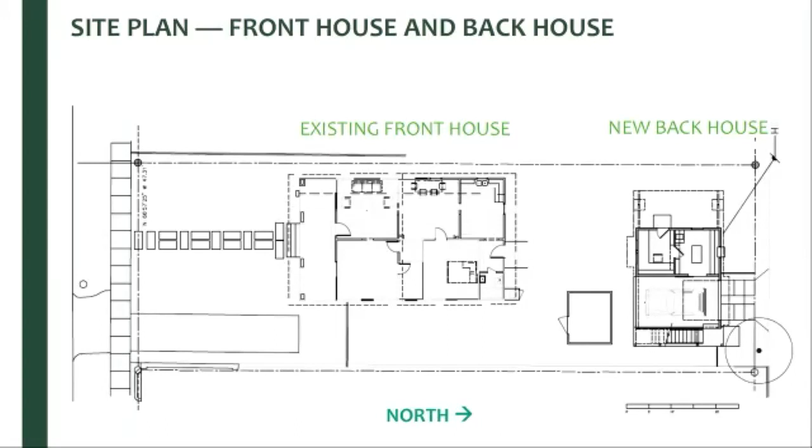Can we go to the next slide? You can see how we left the garage open, and this covered patio zone open as well. We're going to start by looking at the parts of the back house that we as owners use, primarily my access. Right now we're in that volume on the bottom first floor with the two windows in the stucco facade — that's where Craig and I are sitting now. That's my little 100 square foot home office, and I access it through the cantilevered, covered porch.

If we go to the next slide, you can see how half of the downstairs volume supports the front house, and the other half is dedicated to the back apartment, which is where we host friends and family, as well as short-term rental guests. Want to talk about the flow at all here?

Just that the flow for Dave and Molly basically comes from the main house to the back house, so the entrance to the office is on the right there. The flow for the guests typically comes off the alley — they enter usually if they're from out of town, coming by car, and they need a place to park, then they go up the stairs to the apartment upstairs.

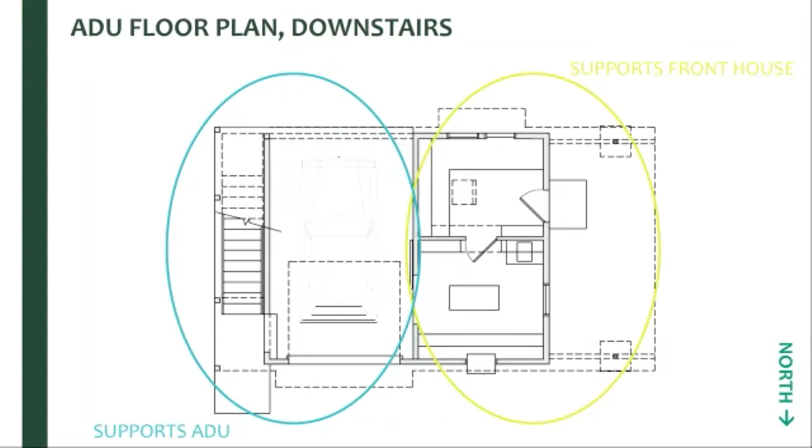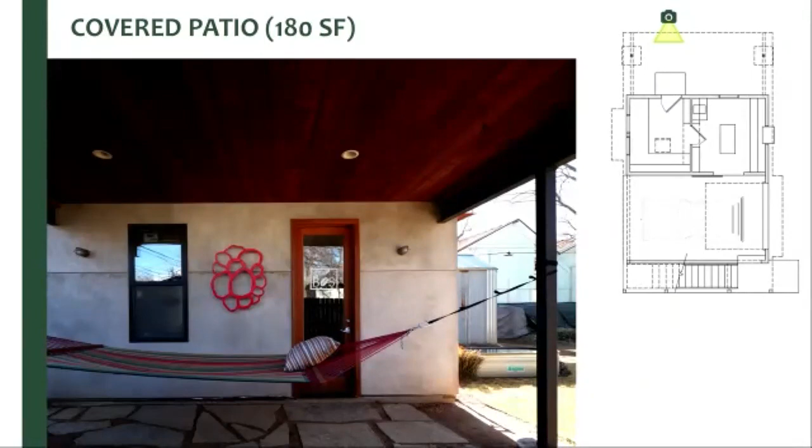Next slide, please. This is the covered patio zone, just outside my office. And if we go to the next slide, you can see the office itself.

The plywood wall cladding is a detail that I carried through from the storage room, which we'll go to next. It was a way for me to be able to hang stuff wherever, whenever I wanted, without necessarily needing to find a stud. Typically I'm still looking for a stud, but if a stud isn't where I need it to carry some load, that's 3/4 inch plywood on all the walls.

So it's all outfitted pretty rough and ready from the Texas State Surplus Store.

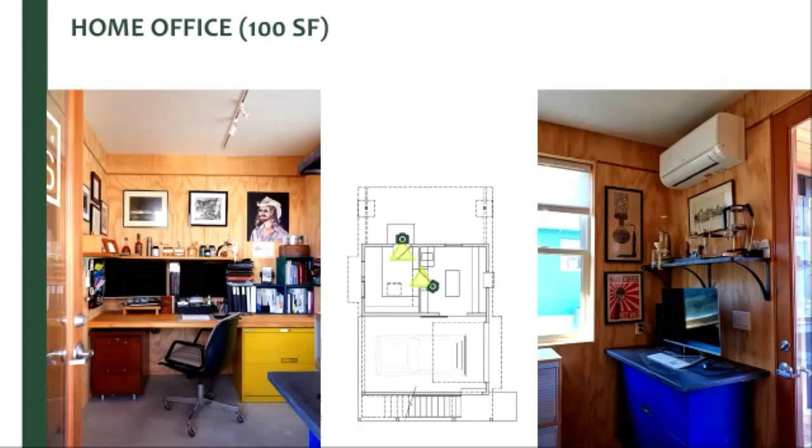Next slide, please. So you can see here, this is going from my office into the storage room. The second picture is from the carport back into the storage room.

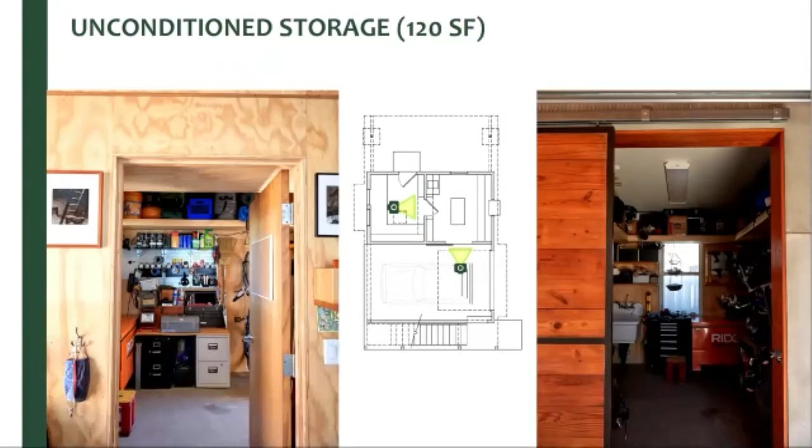If you go to the next slide, you can see that's one of two custom-made sliding barn doors we're using throughout the back house. We're using barn doors and pocket doors to minimize losing space to swinging doors. The nice thing about the barn door in this location is when Dave's working on a project, he can slide the door open and pull his tools out into the carport, or use the carport as a covered work area. It seems like every time I come over here, he's got some new woodworking project going in the house, and that really works well. It's an extra wide door, so it's a lot easier to manage an extra wide opening with a sliding barn door.

One of the things I wanted to talk about is a theme throughout the house. If we go back, please - you'll see there's a lot of salvage wood here. This is all antique longleaf pine. I've incorporated it into all the soffits downstairs, the door cladding, and the door trim details for the garage door and the door into the storage unit. That's all salvage pine that came out of 100-year-old homes being pushed over to make way for progress. For me it was really important to keep some of that high quality material out of the landfill and showcase it here in our back house, and it carries through some of the look and feel from our front house.

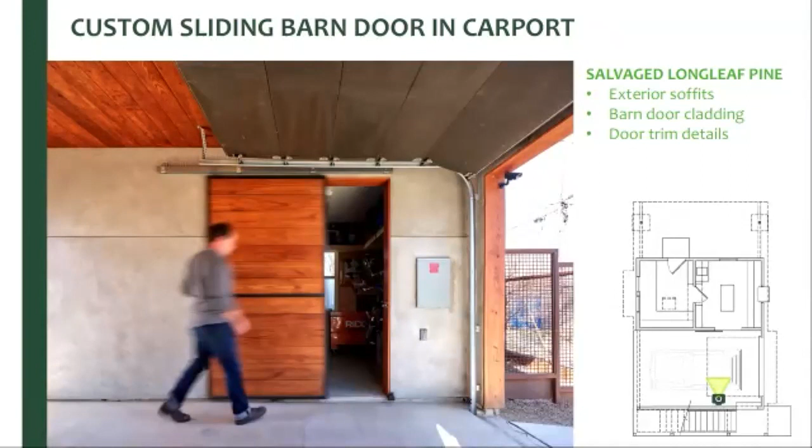Next slide, please. Want to talk about the alley? Yeah, this is the alley view of the house, and there's a couple of neat things about it. One is that it has an appealing presence on the alley, making it welcoming for the guests staying upstairs to enter.

We also have the majority of the service parts of the building - the electrical service, the solar inverter, and the mini split condenser - located back here in this area, which makes it easy for someone to service if needed, but also keeps it out of the yard area of the interior.

You'll also notice that the ground level of the structure is stucco, and the upper part is Hardie board siding. Having those two distinctly different finishes allows the house to look like an elevated cottage, which is really similar to a lot of the smaller homes in the neighborhood.

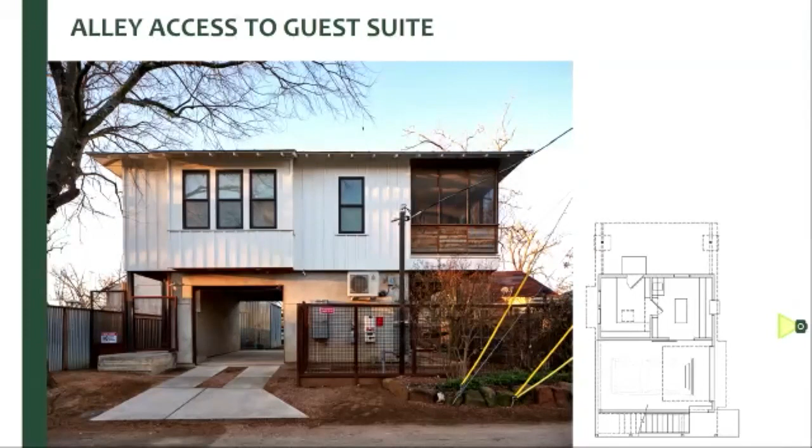Next slide, please. So this is the stair approach to the guest suite. Next slide, please. Craig will talk about the flow up here, or the program up here.

ADUs are allowed a maximum of 550 square feet, so that can be a challenge to make it really work well. A couple things we did was really maximize the circulation, so that when people are in the home, they experience the house in a couple different ways.

The doorways that lead to the screen porch - you can get there either from the kitchen in the morning with a cup of coffee, or from the living room in the evening sitting on the screen porch with its views towards downtown. And then in the living room itself,

it has a roomy feel because the space expands in basically all directions. There's a little bay window off the dining table, it expands into the kitchen, into the porch, and it's also a vaulted ceiling.

The circulation through the bedroom and through the bath, with pocket doors that hide away into the wall, allows someone to flow through the bathroom back through the entry as well. The other thing important to note here is we put the washer and dryer outside the building envelope, which we'll get to a bit more later. Yeah, if we can go to the next slide.

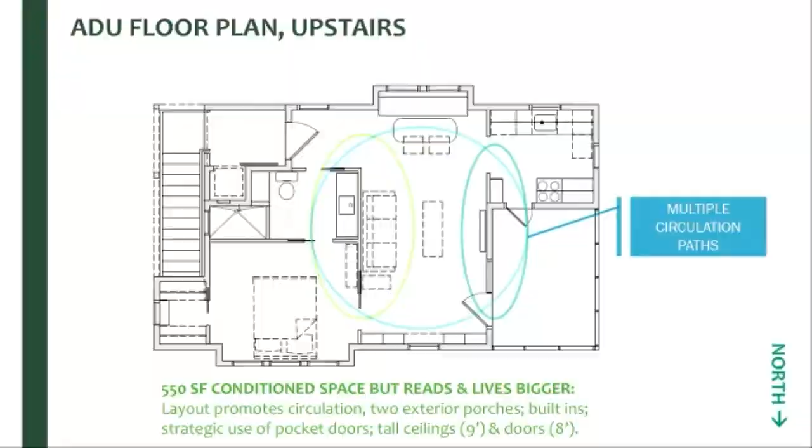So the downstairs is very utilitarian feeling, to be honest, and some of that's intentional. But when you come to the top of the stairs, it's like this jewel box. Part of what happened here is a series of lucky, happy accidents, where Molly found a 3.5 foot by 8 foot door made out of antique longleaf pine with really nice frosted glazing. You can see by the stars in the corners of the panels that it's a door that came out of the Texas State Capitol, found in somebody's garage.

It was on Craigslist. The wall material and floor material was a remnant pallet of wood that I was able to pick up for dimes on the dollar and use here. They were all short pieces of wood, a mixed pallet, and it would've been difficult to use in a lot of commercial settings, but this is such a small little landing at the top of the stairs that it just worked perfectly.

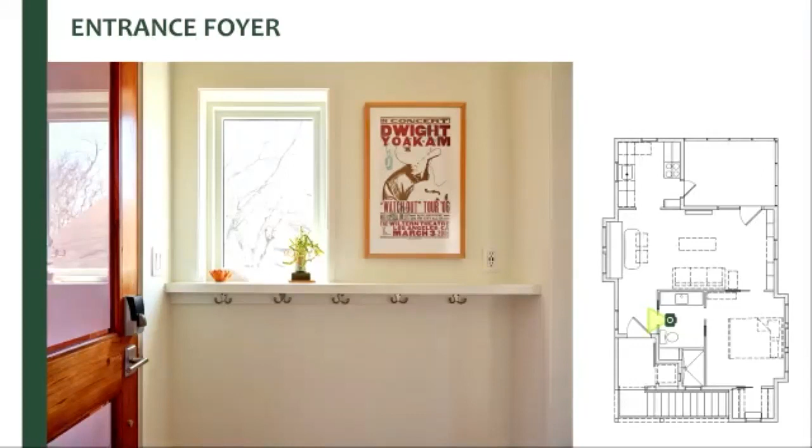Next picture, please. Even though this is a tiny little back house, it has sort of a foyer, which our 1,000 square foot front house doesn't have. There's something interesting in this foyer that compresses everything. Before you go to the next slide, please.

It's always interesting to me that the back house is small and intentionally feels smaller. We tried to keep it scaled down from the front house, but this is the biggest room on the property. It's bigger than any single room in the front house. Yeah, so we can go next slide.

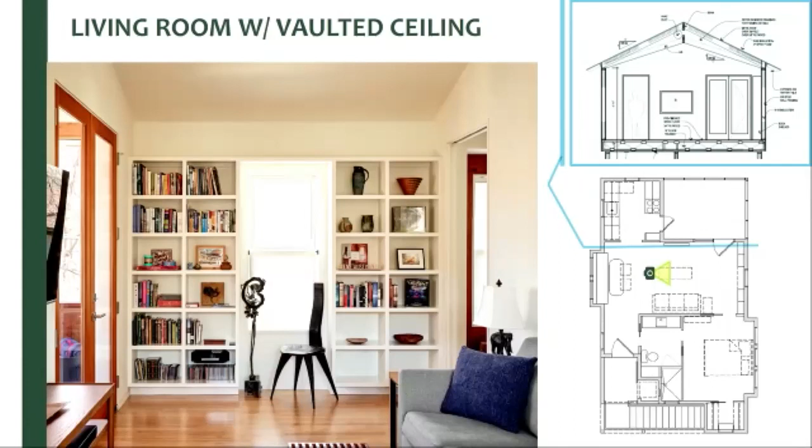This is looking at both ends of that kind of living room, that multi-purpose space. This is the little dining bay that you experience when you walk into the house. There are 2 bays upstairs, which are really helpful in a couple of ways.

One is they make the space feel a little bit bigger without making the whole room bigger, because we were right on the line in terms of 550 square feet. We needed just a couple more feet for the dining area, so you can walk past it into the living area, and we also needed a couple more feet in the bedroom area. But also those bays correspond to elements on the first floor, which is windows above the office and the garage. Next slide, please.

Next slide, please. So here you're looking from the living room into the bedroom. You can see the living room is primarily a couch, TV, and a little dining zone, but it's pretty luxurious when you think of it as a guest suite, because if you go to the next slide, you'll see the bedroom is completely separate from the living room. Next slide, please.

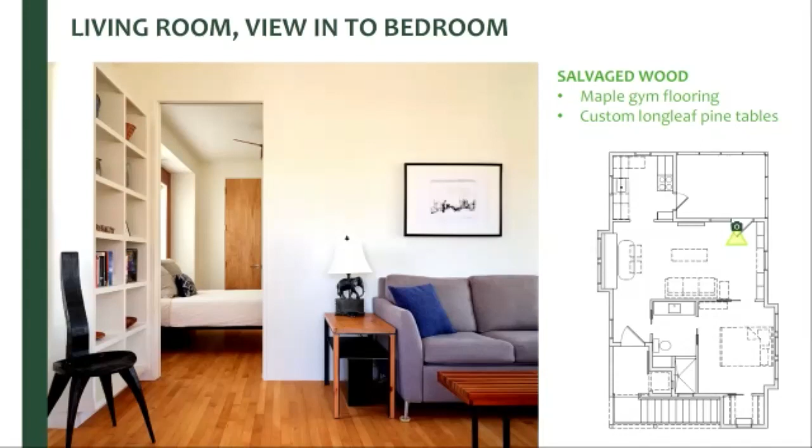Because it's a small space, we were able to do some interesting things. We had a friend build a custom-made bed for this space, which is a standard queen size bed in a manner of speaking, but it's designed for a compact footprint. You can even see the offset leg on the bottom, so it's not a toe banger. Where we have this bump out, I did a treatment using the salvaged longleaf pine, which created a headboard of sorts, an accent wall behind the bed.

So, next slide please. Want to talk about anything here, Craig?

Yeah, and it's worth mentioning that all of these interior doorways are 8 feet tall, so they're extra high, and the ceilings are 9 feet tall. So again, it's a small space, but it reads a little bit bigger.

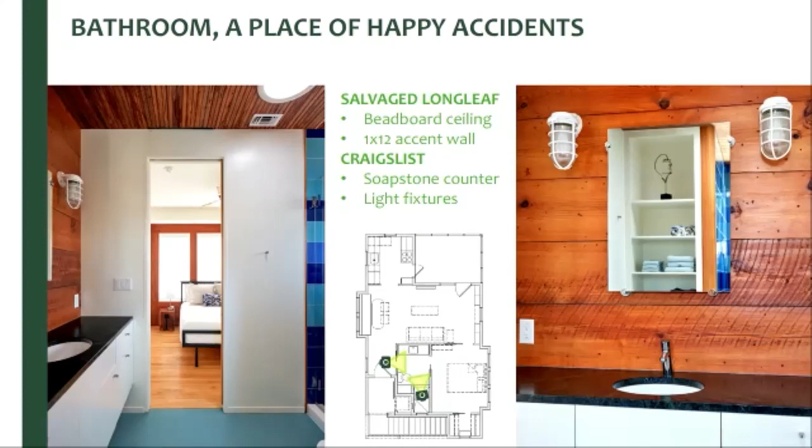If you go to the next slide, you can see we have friends who donated some remnants of tile that came out of a public art installation, at the district chiller cooling station just north of the convention center. When we finished tiling that shower surround, we had exactly 5 tiles left over — essentially the remnants of the remnants of the remnants of the tile off of that project. What was interesting is that it was this found material, donated from friends of ours, Stan and Martha Pipkin, but it pushed us out of our comfort zone. It's one of the more interesting moments in the back house, in my opinion.

Next slide please. You can see here the other thing worth mentioning is that there are a lot of built-ins, and for the most part they were in the original plans. We knew that if we did built-ins, we could get a little more space — things would read a little bit bigger.

One of the interesting things as we're looking through these slides is that because you can see into the other rooms, the natural light in this space is really good. Depending on the time of day, there's always some light coming into the home. In all these photographs there are no interior lights on, because it's a really nice space with all the filtered light coming through.

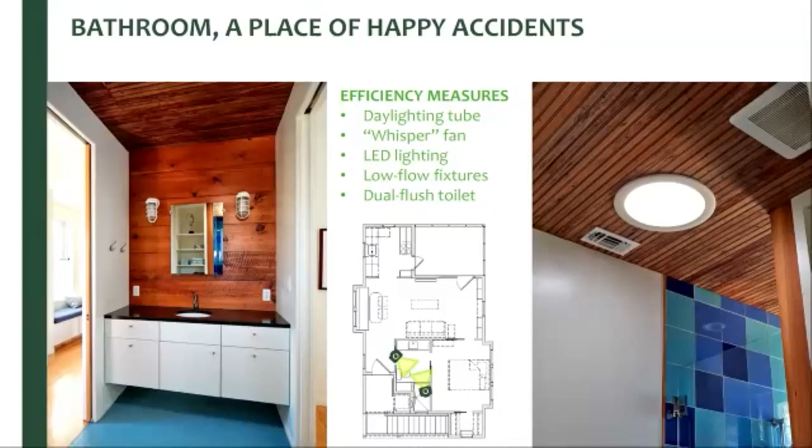One of the things we did, maybe not part of the original plan, was sneak in a sun tunnel that brings light in off the roof into the bathroom. Normally you'd put that on the south face of the roof, but in our case we put it on the north face because, as you'll see later, there's solar on the south face. Next slide please.

This is another strategy for bringing light into the room. This was the screen porch — during the shoulder months, the time of year when you can live with your doors open, this makes it a really pleasant space where you can put the doors open and enjoy that additional porch area as part of the living space, or just be out on the porch. The porch is on the northwest corner of the house, so it has views towards downtown, which also makes it an interesting place to be.

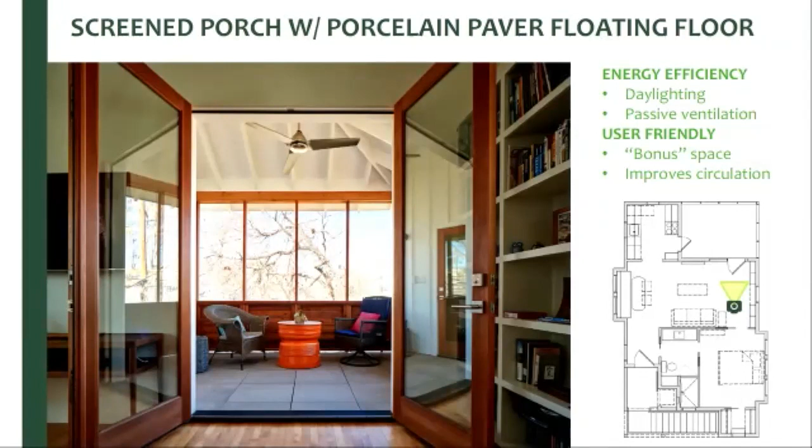Okay, next slide. What's sort of interesting, as a little setup, is that the porch is actually bigger than our kitchen. So Craig found a way to make a kitchen work in 64 square feet.

The basic layout is a galley style kitchen, which is the most efficient way to lay a kitchen out, because you don't have any lost space in corner cabinets. We also went to smaller appliances — a smaller dishwasher, smaller refrigerator, smaller stove, and a single basin sink, which is really all you need with the dishwasher.

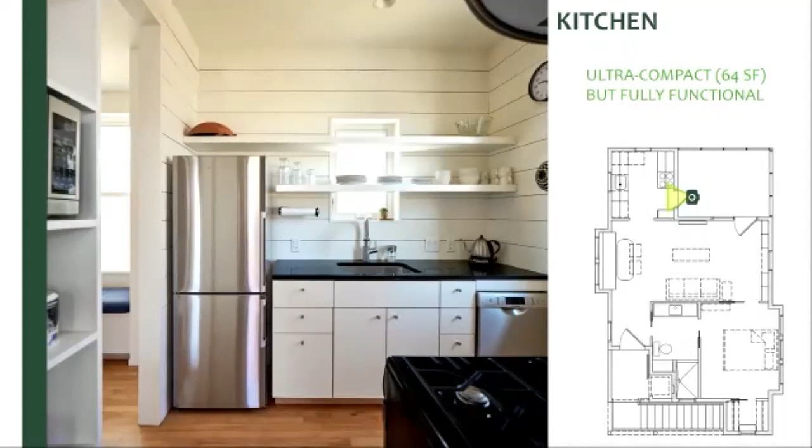There are two windows in the room, so you have light coming from two different sides of the building, and there's also access to the screen porch, which makes it feel like you can just walk out there in the morning to check the weather. The open shelves make it feel more open as well, and since it's used primarily as a short-term rental, it just has the basic things you need for staying there a few days.

I think one of the things we did here is reuse salvage wood again. In this case I painted the shiplap for use on the walls. Because it's a small space, I could use material that's labor intensive to salvage, but it's a place where we could use it for maximal impact.

So this is us heading back out of the apartment. One thing I should mention is that these floors are nice maple floors, but they're salvaged. They were originally a gym floor, and they were reinstalled here and then refinished.

Want to talk about the built-ins? It allows for a little additional storage. We use it to tuck in all of our toilet paper, extra towels, and a lot of the things we need to operate that guest suite.

One of the craftsmen who worked on the house, Aldo, helped me build the table also. It's a nice artistic element as you walk into the house, made from a live edge slab of pecan, which is a native wood. We built two tables specifically for this back house, and the bed. There's not a lot of furniture back there, in part because there are so many built-ins, so we were building things to fit the spaces.

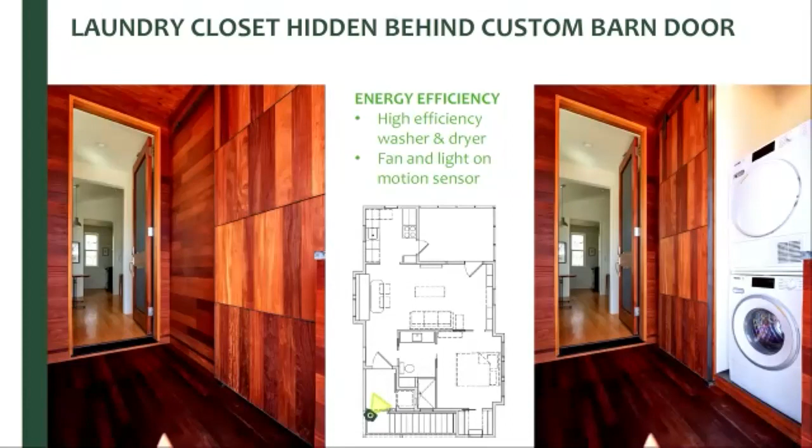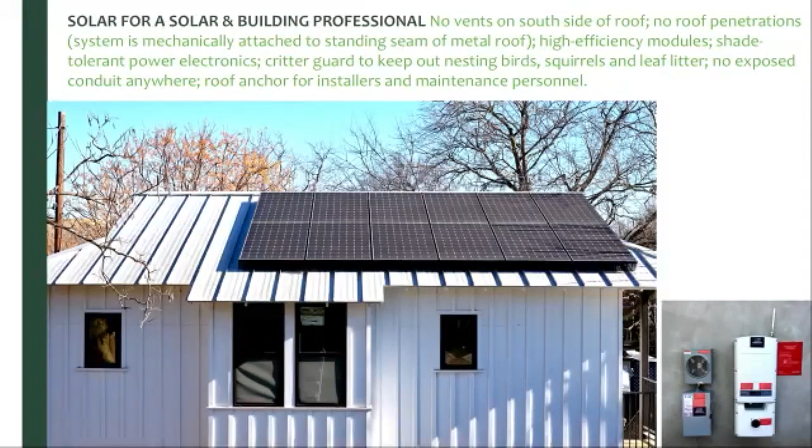Here you can see 4 kilowatts of solar on the roof. I work in the solar industry, so I had some priorities for the array. We made sure all the vents run to the north side of the roof, and specified a true standing seam metal roof that lets us mechanically connect the solar array to the seam. So the only roof penetration is a single conduit collecting all the electrical off the roof, which runs inside the framing down to the inverter at grade level. Even at the inverter, there's no exposed conduit anywhere—that was really important to me.

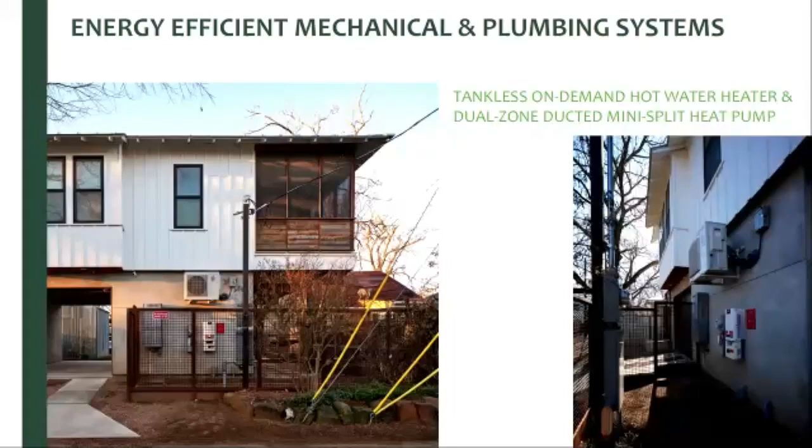This is again the utility corner where all the business is happening with the service and mechanical system. That's a tankless on-demand hot water system, ultra high efficiency, and it's also an ultra high efficiency two-zone mini split system. It's ducted upstairs, and there's a separate cassette down in the office, but they share the same outdoor condenser.

This is just to quickly show you how we worked. You can see the top left is actually a picture from the inside of our front house, where we have a lot of the antique longleaf pine exposed.

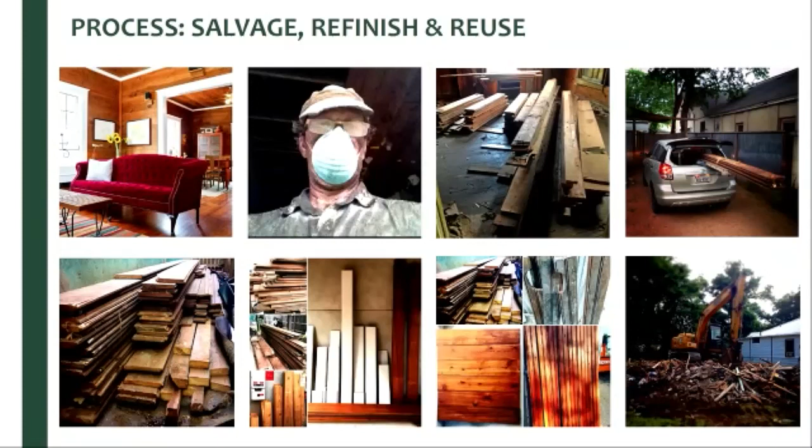And so I was going into these old homes in the neighborhood, salvaging material and refinishing it before those homes got demolished. You can see here this was originally a 1x12 board that had wallpaper on top of it, and it got repurposed into a bathroom vanity.

Here I had salvaged some 2x4s out of a ceiling, and I knew there were no nails, so it was clean material. We were able to rip it down and make a slat table that serves the back house.

Some of our friends, like Aldo and Sean and others I know—I've essentially worked in the building trades my entire adult life, and a lot of our friends and neighbors are in the trades, so we used a bunch of them on the back house.

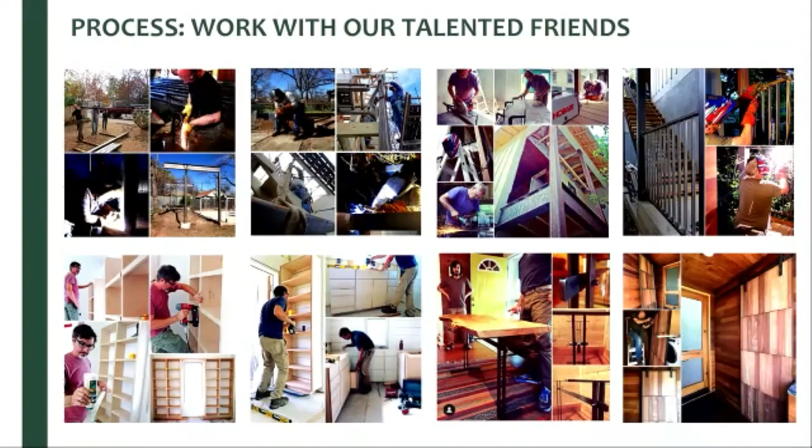And then Molly and I did a ton of work ourselves, so you can see us working here. Next, want to talk about the alley?

This is an exterior view of the house from the alley. One of the beautiful things about ADUs on the alley is that I feel they make the alley a safer place, because there are eyes on the alley, which makes it safer for people to walk and use. It also creates more pride in the alleys, and each homeowner starts taking better care along that fence line.

This is also a good view of the roof line, which we really considered because it's a taller structure on the back of the lot. We wanted the roof line softened by doing this hip-gabled technique, which also allowed us to have a large shed area facing south for the solar array.

That hybrid roof also allowed us to justify the array to the right to avoid some shading—moving the array to the east to avoid shading in the afternoon from a neighbor's tree. And that's the end of our tour.

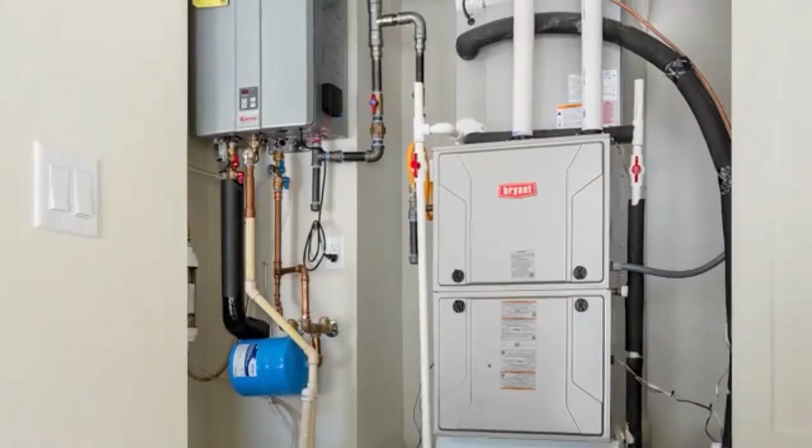The home's two-story design uses efficient cooling strategies, including deep overhangs, a metal roof raised above the roof deck, and a staircase to maximize natural airflow and ventilation. A sloping roof allowed the architect to include high recessed windows to provide natural daylight without overheating the residence during the hotter months. Efficient appliances and equipment include LED lighting, a variable refrigerant heat pump for heating and cooling, and a tankless gas water heater to help the homeowners save on utility bills.

With the desire to safely age in place, the homeowners created an accessible bedroom and bathroom combination on the ground floor, with a wheelchair-ready bathroom that includes a roll-in shower and roll-under cabinets. The couple enjoys outdoor living with an inviting front porch and a second screened-in porch that takes advantage of the prevailing breezes, creating a pleasant space where they can relax throughout the year.

The homeowners' desire to nestle into the Texas landscape and enjoy their natural surroundings on a challenging lot inspired their goal of building an environmentally responsible home using high-performance building strategies. They stepped up to the challenge, creating a practical, livable, and sustainable home by maximizing both indoor and outdoor spaces, while ensuring their access to spectacular Central Texas views. This thoughtful planning will bring them enjoyment for many years to come.

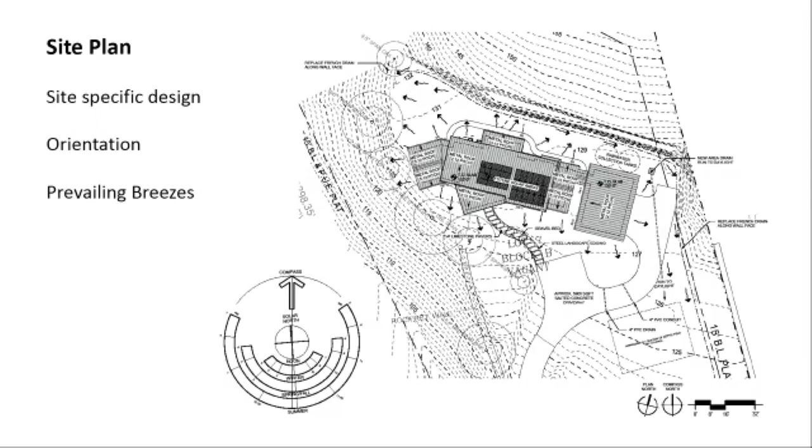We design, and this is important for planning, to show the builder and everyone else where the solar panels are supposed to go - those are the two darker rectangles on the roof. We've learned our lesson there, because if you don't show that, a plumber might run a plumbing vent up through there, or the AC guy might run his furnace vent through the area planned for solar panels. So that's really important to do.

You'll see the porch on the left, which absorbs the prevailing breezes, comes up through the kitchen and up the stairs and out the stair tower windows at the top. So we create a siphoning effect going through the house, not just cross ventilation, but a siphoning effect.

From an indoor air quality perspective, we separated the garage and workshop from the house, so the somewhat unhealthy air in a garage - from off-gassing from your car, lawnmower, leaf blower, or paints - doesn't migrate into the house. That was important to them. Their health was critically important, as was daylighting.

Do you see anything on this you want to note? Well, I think two things to note: the front door faces the approach from up the long drive from the street side, and we also wanted to take advantage of the ravine to the left.

Hence the screened porch, which we typically don't like on the western side, but there's a high hillside just across the ravine, so it shields the screen porch from the west, and we get to really take advantage of that natural feature - one of the primary reasons why the client bought this piece of property.

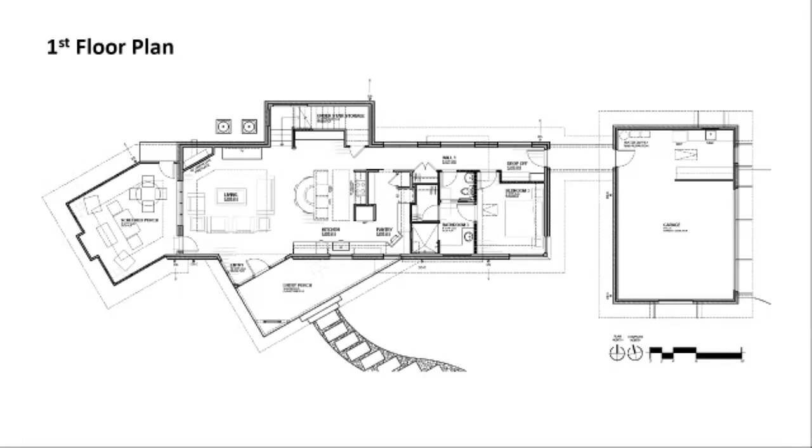But if you look at it, it's a pretty simple rectangle with just the front porch turned at an angle and the screen porch turned at an angle. So it's a very efficient home to build. Let's go on to the next slide.

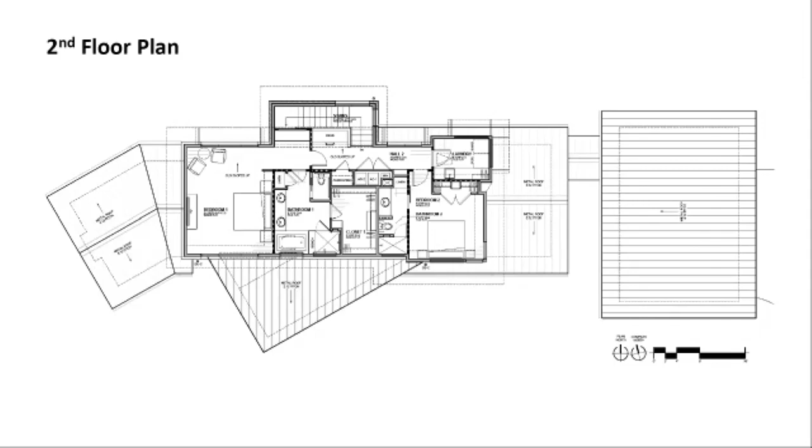We talked about the east-west orientation. You'll notice the roof has quite a big slope facing south, so it would make for a fantastic solar collection device. We pre-wired the house, as we do with all of ours, for solar. I don't believe they've installed the solar yet.

So you actually have more windows with unobstructed views and unobstructed access to daylighting outside because you dealt with the issue on the outside of the house rather than the inside of the house.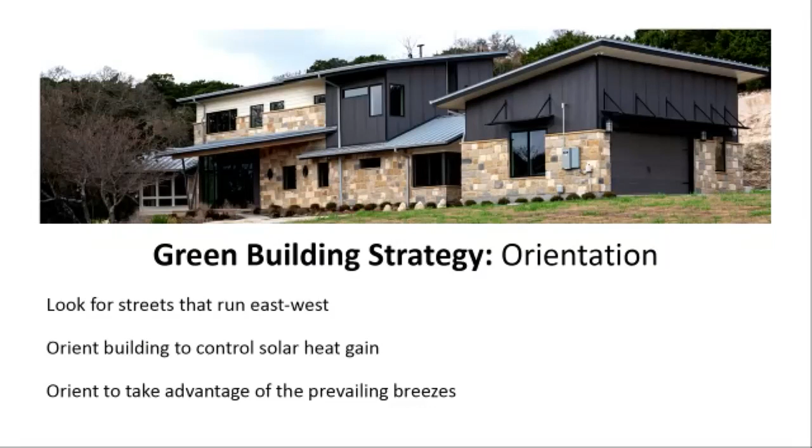Next slide. Joel had fun here, our project manager. Joel's behind us. We developed a new detail for the awnings to be hung from above instead of brackets going down below. Anything else in there, Joel?

Well, it's important to note that typically we like to put our garages on the west side of the home to use that program to shade the rest of the house. But in this case, with the hill on the west side, we weren't so worried about the western exposure. And they also had a neighbor to the east that was actually fairly close to the property line, so they really wanted to use the garage as more of a privacy buffer than an energy saving.

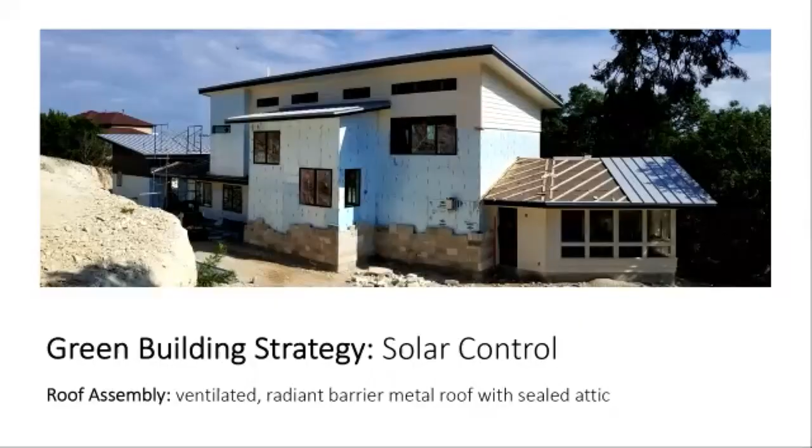And the reason why the lathing is shown running at angles is so we didn't have to have two layers of lathing crisscrossing. We just had one that can go from rib to rib on the roof, but at the same time provide air channels. There's some details about how we separate all the wood pieces so there's a continuous flow of air from the overhangs up to the ridge. It reduces the heat flow into the attic much more so than a previous product we developed, which was called Tech Shield Radiant Barrier. This is the type of stuff I really get into, and you can tell, but let's go. Next slide.

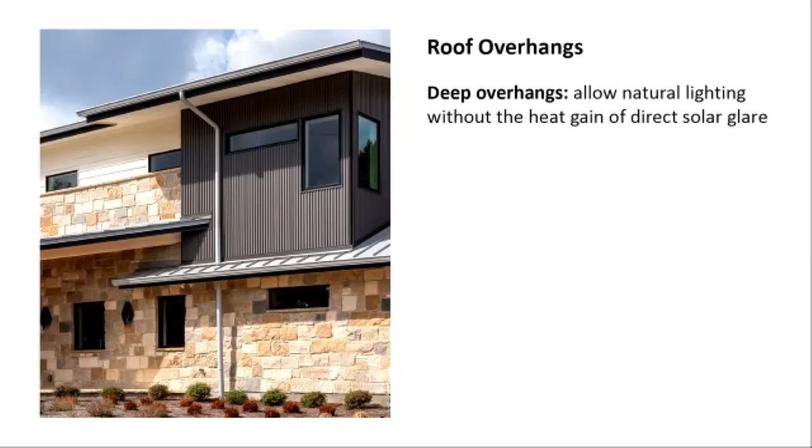Next slide. Many years ago, I was attracted to come to the University of Texas because of a professor, Paco Arumi, who was developing the first means of using computers to analyze how houses actually use energy. And then through Mac Holder, my former employer, we developed that into a very useful design tool. And we can actually show our clients, gee, if we do have this glass that goes a little bit further down to the ground, it's going to add a half a ton to your air conditioning needs.

So we can really tweak the window pattern, the awnings, and the air conditioning system to make sure we've optimized the house. And we do use old school solar angle calculators by Libbey-Owens-Ford.

I'd also like to comment on the neat design here of the awnings. Joel, that was something you did. We were trying to adapt our more standard detail for that inverted awning over the garage door, so this was another iteration to get the two different types of awnings to relate to each other.

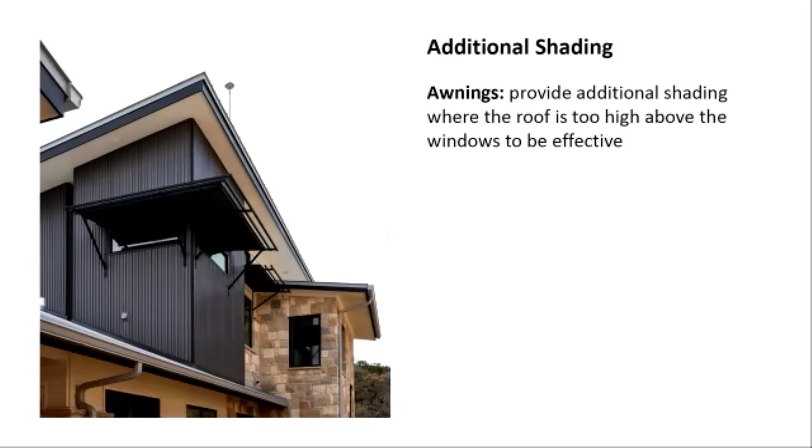I think the big thing is when you have a long face facing north, load it up with windows, take advantage of that free reflected light to bounce it into the house in many different ways. In this case, the light colored metal roof and the white soffits help reflect and bounce light into the clerestory windows, pushing it further into the house and increasing the daylighting.

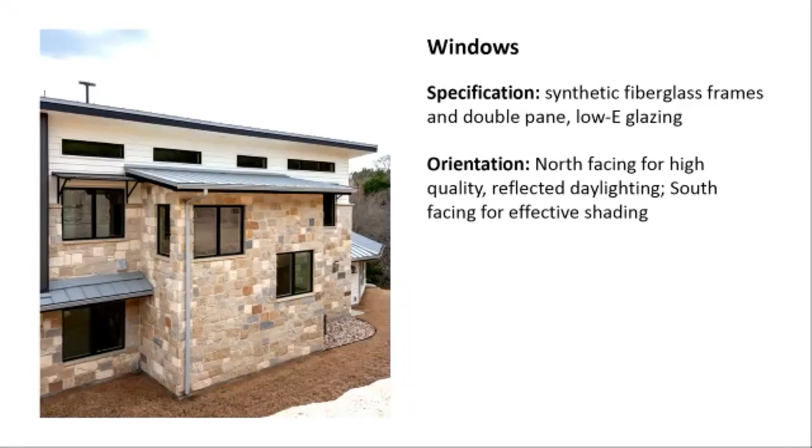We actually used that big cut in the limestone bluff behind us as a big reflector of daylight into the house.

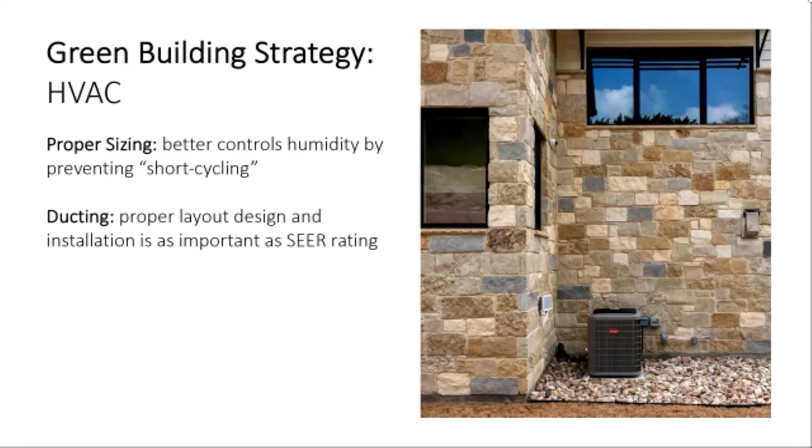This is one of the great things about that energy run I learned to do through Mac Holder's office. It really helps us closely size the air conditioning equipment to the actual load. I presume at this point many listeners understand how an oversized air conditioner isn't good for you because it doesn't provide good humidity control. So we're very fastidious about making sure the air conditioner is not oversized and works a lot, so it really dehumidifies the house well because it runs longer.

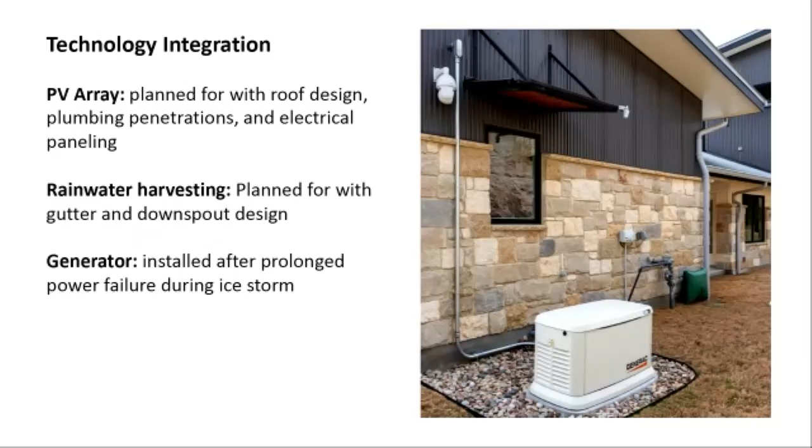There are people who think, well, I want to do a solar system and put a bunch of Tesla batteries up in the garage, and then I've got my protection for a power outage. But if you do the numbers, you might get about 4 to 8 hours of stored energy, and then you're in the cold, so to speak. That's one of the lessons we really learned during the freeze this February. As much as we love solar systems, guys, we do, they are not a substitute for some type of emergency source of power. In this case, a small natural gas fired generator.

Next slide. Well, I'll say one thing.

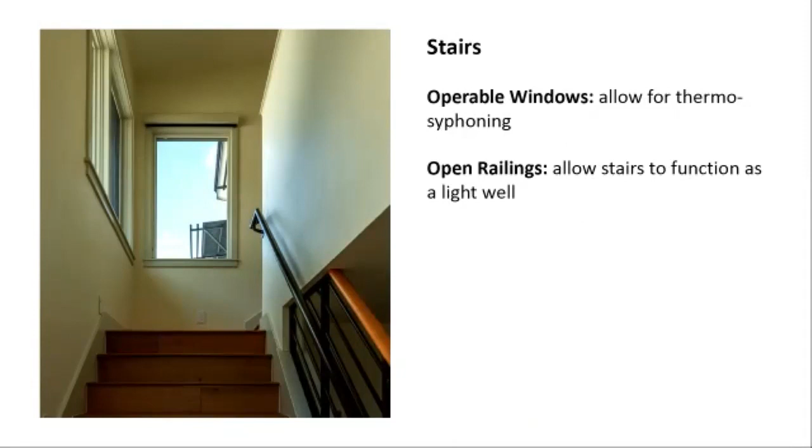I think you see the operable windows up at the top of the stairs so we can vent out the house. Next slide. Clerestory windows you see up in the right there that bring in a lot of reflected light into this upstairs hall area.

And also down the stairwell too. Yes. Next slide.

We talked about this, but this is the garage on the right. No, the garage on the left and the house on the right. Doesn't matter, the point is they're separated, so we don't have any of the bad air from the garage migrating into the house. Next slide.

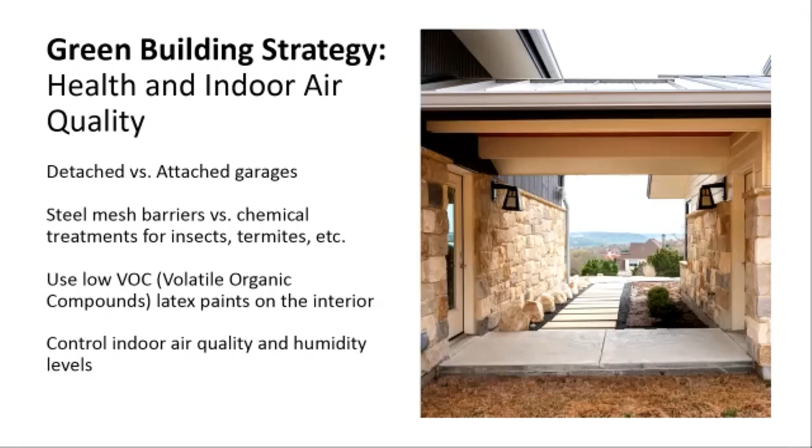Spray foam insulation is just so wonderful for keeping humidity out and reducing air infiltration. We really take pains to wrap the house in a good weather barrier, a commercial grade building wrap. We don't believe in just taping pieces of plywood together and calling that a wrap. We also really promote the sealed attic perspective.

We have a ventilated roof system on this house with a sealed attic, which is the best of both worlds. These are consistent practices on all the houses we do, and we test it by having our clients, after we design with an energy analysis to tweak the performance of the house, send us their utility bills for the first year. Then we go back and compare the real world results with the theoretical energy analysis. Usually we're within about 5 to 10% accurate.

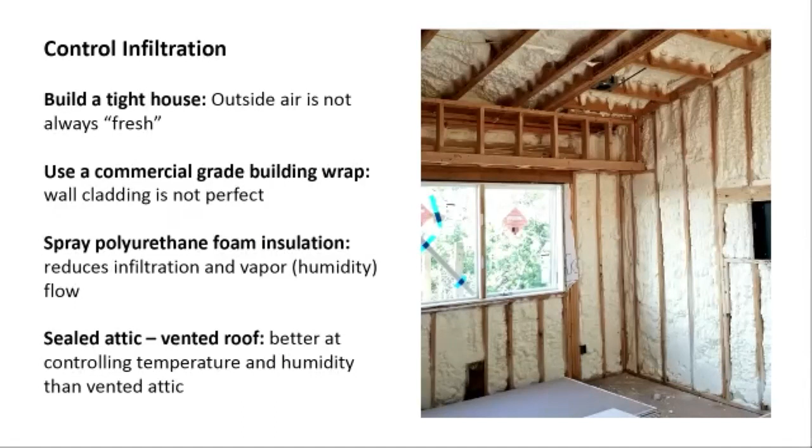Next slide. Oh Joel, what do you think here?

As requested by the client, the primary master suite is upstairs, which is kind of unusual for an age-in-place situation. But as we discussed with the client, they really believed in the health benefits of navigating those stairs daily, just to keep them more active. We had a cardiologist client say to us many years ago that his healthiest patients are those who have to go up and down stairs often every day.

Next slide. You'll notice something here with the bathroom. Aside from a kitchen, a bathroom is another place where we use a tremendous amount of energy, primarily associated with lighting. Let me just stop there for a second.

The reason why you hear us concentrating so much on the way we address daylighting and lighting is that, next to air conditioning, your second biggest consumer of energy in a typical custom home isn't the heating, isn't the water heating, but it's the lighting system. That's why you see we do so many light colored reflecting surfaces and try to harvest outside daylight as much as possible.

As we get older—which of course Peter and I here, Alan might be, but I'm not—aging in place doesn't only include physical access, it's harder to see as you get older. Your eyes start not taking in as much light. So this constant attention to lighting and daylighting helps a client see better as they get older.

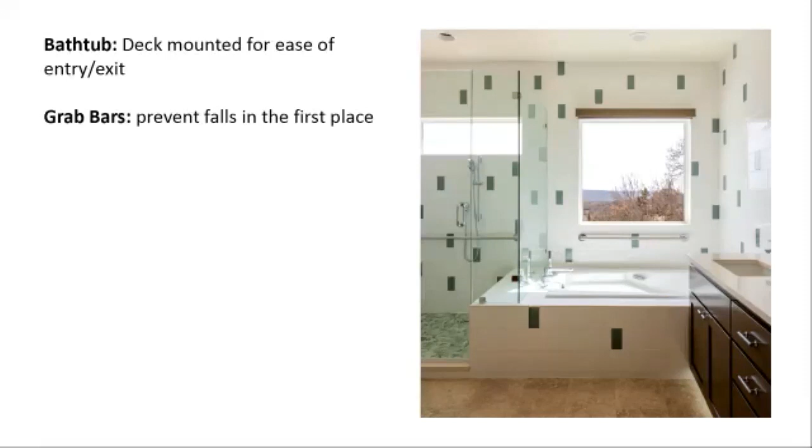You can use them to hang your washcloth if nothing else. Next slide please. You see the grab bars around the bench there in the shower.

This is a first floor guest suite, which can act as a second master in the future if the owners ever get to where they can't negotiate stairs. Here we do have really full handicapped access roll-in showers and roll-up vanities done in more conventional ways. Next slide please.

We have not installed the rainwater collection system in this house yet, but it's set up with the guttering and the downspout to bring most of the roof water to a central collection area if you want. These clients had a rainwater collection system running their previous house, which was located out in the hill country in Bertram, and they're very familiar with it—we just hadn't gotten around to doing it yet when we were building this house.

They were wonderful people to work with, and it was so much fun having clients who had been in one of our houses—what was it, 15 years ago we designed it—and we were able to sit down and very bluntly talk about the things that worked and the things that didn't work so well. So how often do you get to do that, where you get to tweak it and try to do a better job at it?

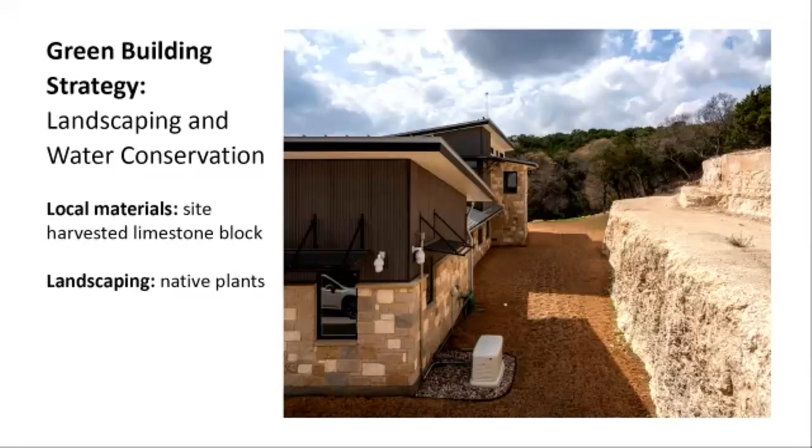Next slide please. I think that's it, is it? Oh, the water filtration system—that's one thing they did get spoiled about because of the rainwater system they had in the previous house. So we have a really good water filtration system out there in the workshop that services the house.

Charcoal canisters take all the chemistry out of the water, all the chlorine and other things, and then an ultraviolet filter really disinfects the water. So this is a really high grade of water in this house, better than what you buy in the store. Joel, anything to add to that?

This water softener system is actually a saltless system, and that was one of the lessons the clients learned with their previous house. They installed a salt-based system earlier in their previous house, and were really disappointed with the harmful ecological effects of that really salty discharge from the system—salting the earth. So this time around, they really wanted to make sure they didn't have that issue.

The community's structure, around a large terrace courtyard, features balconies, raised beds for vegetable gardens, and shaded spaces for outdoor grilling and socializing. Light-colored paving helps reduce trapped heat, and wide overhangs shade the windows, reducing the impacts of Austin's hot summer climate on residents and keeping cooling bills to a minimum.

Inside the apartments and common areas, durable finishes, LED lighting, Energy Star appliances, and efficient HVAC systems combined with low-flow plumbing fixtures keep maintenance, energy, and water bills low. A 177 kilowatt solar array scheduled for installation in the summer of 2021 will supply enough energy for 80% of the complex's total needs.

This spring, Waterloo Terrace welcomed its first residents to their new 3-star Austin Energy Green Building rated homes. Foundation Communities' mission prioritizes resident well-being, offering a range of supportive services, on-site bike storage, and the use of healthy construction materials, making this community a safe, affordable, and sustainable place for Austinites to call home.

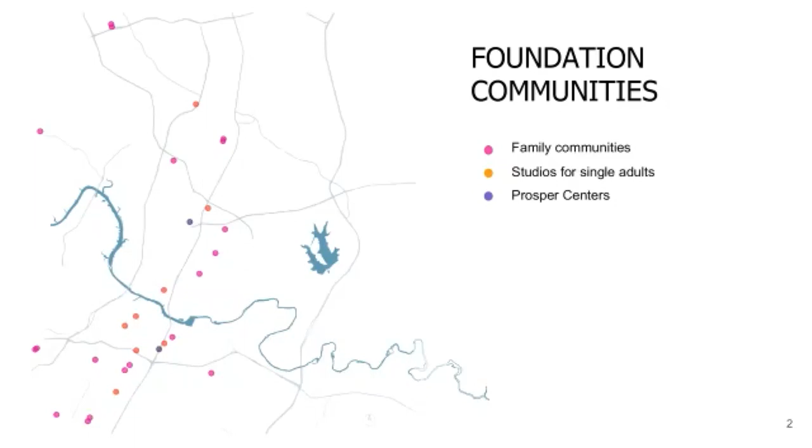At Forgecraft, we've made a strong investment in both affordable housing and sustainable design as part of our own mission, so we really value this partnership with you. Waterloo Terrace represents our third project with Foundation Communities after Capitol Studios and Bluebonnet Studios, and we've since gone on to do two more: Zilker Studios, a 110-unit affordability unlocked project on South Lamar that just started construction, and Parker Apartments, a 135-unit affordability unlocked project for families, also in South Austin and currently in design. All of us at Forgecraft are so proud of the work we'll be looking at today and are grateful to the folks at Austin Energy for allowing us to show it off.

Waterloo Terrace is our 7th supportive housing property, and we'll be opening Zilker Studios, number 8, at the end of this year. As a supportive housing project, we not only provide homes for our residents, but we have an array of services available to help them succeed. Often these properties house folks living with chronic health problems or disabilities, people who have been homeless, and those living on fixed incomes. All of the units at Waterloo Terrace are available to individuals with an annual income of 50% of the area median income and below - that's about $35,000 and less. Our on-site services include 24-hour staffing, a healthy food pantry, adult education classes, counseling, and medical support, including a registered nurse.

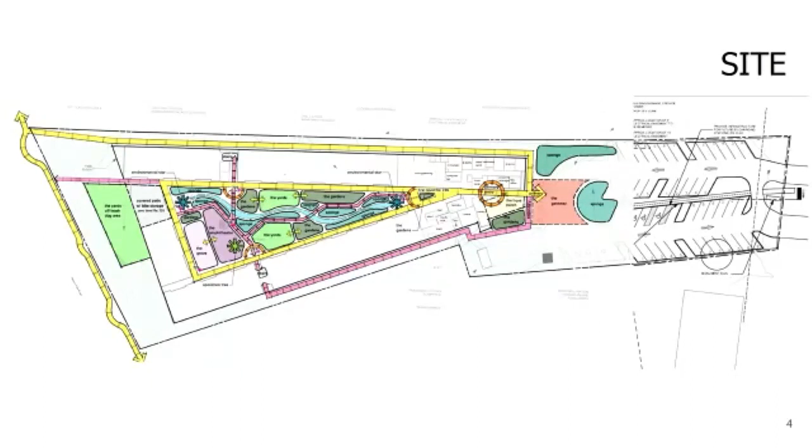Waterloo Terrace is located off of North Mopac, which would trace the right side of your screen on this slide. The Walnut Creek Greenbelt runs past the western boundary of the property on your left, so we oriented our building as close to the Greenbelt as the existing site topography would allow - the last 40 or 50 feet slopes pretty steeply. We also organized the program around a central courtyard, and this did two things for us. First, it created a much needed buffer from the highway. Highway traffic produces a lot of sound and air pollution, and indoor air quality is a major concern in our work. Placing the parking lot between the road and the building really helps to mitigate those effects.

Second, it allowed us to maximize the visual connection to the Greenbelt. We looked for as many opportunities as we could to find views both from the courtyard as well as from the open air walkways serving the units. This connection to nature is a guiding principle behind our design. Foundation Communities' design director, Megan Matthews, always challenged us to let our design tell a story about the building, and I think the story for this building is how it interacts with its environment. I think it's a pretty compelling story.

We'd like to walk through our 3 key design priorities before we dive into the actual green features of the project. First and foremost, resident health and indoor air quality. Healthy air is particularly important to us as our supportive housing residents often have a high occurrence of respiratory issues, and we know that the average adult spends more than 90% of their time indoors. As such, we choose our finish materials carefully, looking for durability, affordability, and health and eco-conscious materials. It was also important to us to have large operable windows to give folks as much of a connection to the outside as possible. On past projects, humidity has been a challenge for us now that we're making buildings so tight and we still need to meet the fresh air requirement.

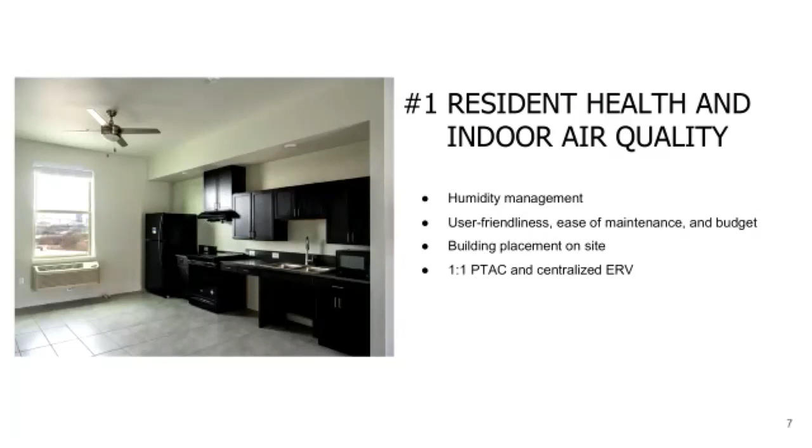So after multiple charrettes with our team, we landed on a combination of a 1-to-1 PTAC, which you can see in this photo under the window, and centralized energy recovery ventilators, which bring in conditioned outside air directly to each unit. The final design strikes a really nice balance between user friendliness, efficiency, and cost.

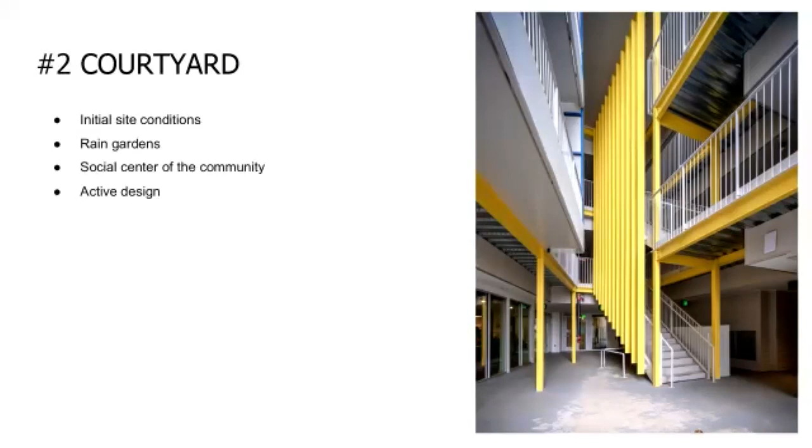Active design is also represented in the circulation through our courtyard. Our site slopes about a full story from one side of the courtyard to the other. Because accessibility is always such an important consideration for us, and especially for this community, we used a long winding ADA ramp to carve out smaller programmatic elements like you see here, and to ensure equitable access for all residents to all spaces. There are 3 generous rain gardens in the courtyard that receive rainwater from the roof, delivered via these vertical blue elements you see lining the walkways.

The courtyard was actually originally designed around a large, beautiful heritage live oak, which would have been just to the right of the photographer for this photo. Unfortunately, we learned during design that it was in very poor health and it had to be removed. As sad as that was, we felt the courtyard had a lot of promise and we kept moving forward with that design anyway. We like to think that the spirit of that live oak still remains in both the new trees and the other plantings throughout the courtyard.

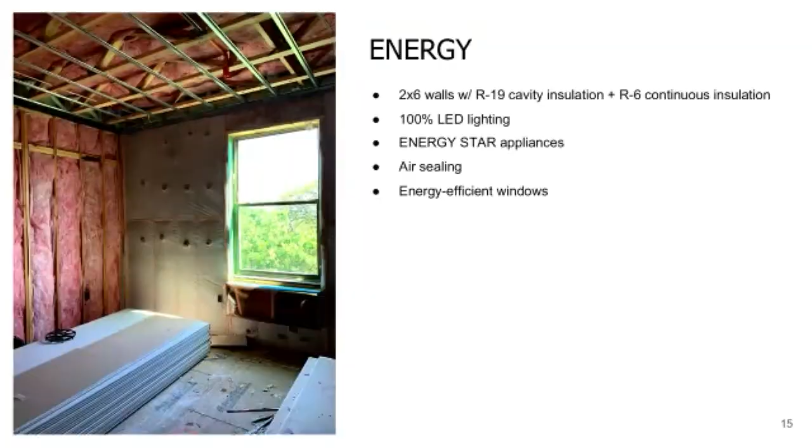Soon the courtyard will be the rich and beautiful environment that we envisioned. These rain gardens are all next to a program space in the courtyard, and they play a really important role in telling that ecological story that I mentioned earlier.

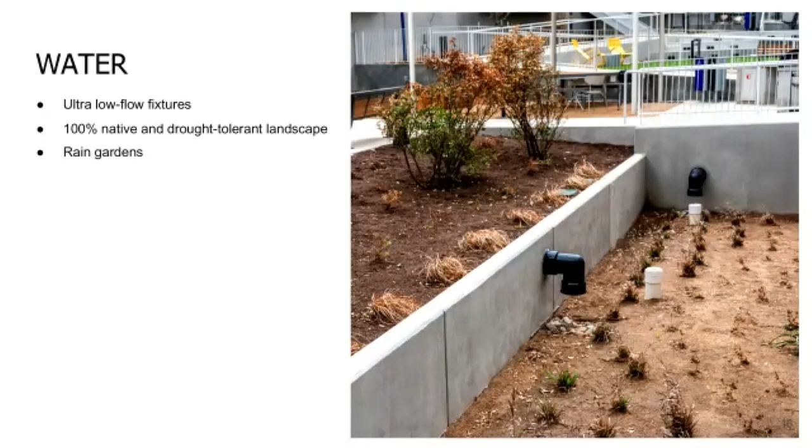As I mentioned before, we use conventional building materials in conjunction with carefully considered details to create a high performance building envelope. We designed interior spaces with durable materials, including ceramic tile floors in all the units. Additionally, we worked with a general contractor to manage waste during the construction process. For this to work well, the whole team needs to be on board from the outset.

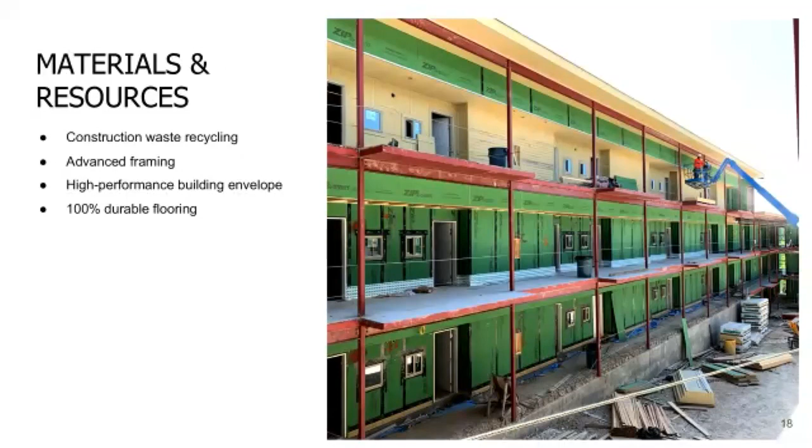Resident education is an important factor in ensuring that the building performs as we expect it to. Our internal sustainability team puts together information on ways to conserve water and energy, recycling, and how to DIY green cleaning solutions. They also offer training for all of our property management staff. In a recent survey of our residents, about 83% said they live a greener lifestyle after living with FC.